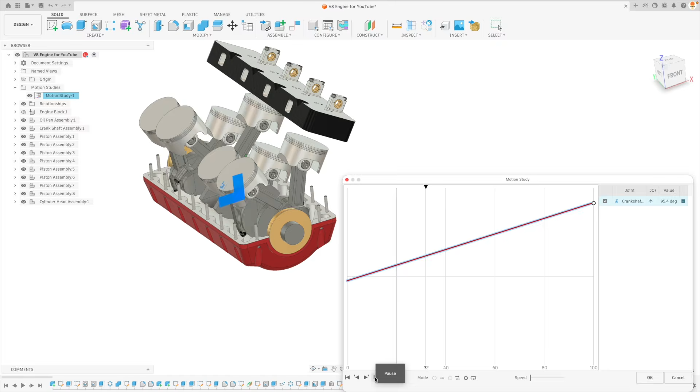Our V8 engine is moving along, but its firing order will complicate the valve train. Today we'll correct the piston sequence, confirm it with a motion study, and model a parametric camshaft with 8 precisely positioned lobes. Welcome to the Learn Everything About Design channel.

Let's correct the firing order and create our camshaft. So the first thing we're going to do with this tutorial is fix something. Let me show you what we need to fix. Let's just hide the engine block, and you can see that the firing order of our pistons, well, it's good, but we're going to change it a little bit. We're going to make our lives a little bit easier in the future.

So we can just go to the motion study, right click the motion study. I'm going to bring down speed, go to infinite loop, and then press play. So this is our current firing order, and again, there's nothing wrong with that, but it's going to make our life a little bit harder in the future.

The second reason why we're going to change it is I would actually like to make it so that it's the same firing order, from what I can research, as a Corvette. So let's do this together. I can show you how easy it is, especially because we have designed this entire assembly very well, and it should be very easy to make this fix. And you'll learn some things along the way too.

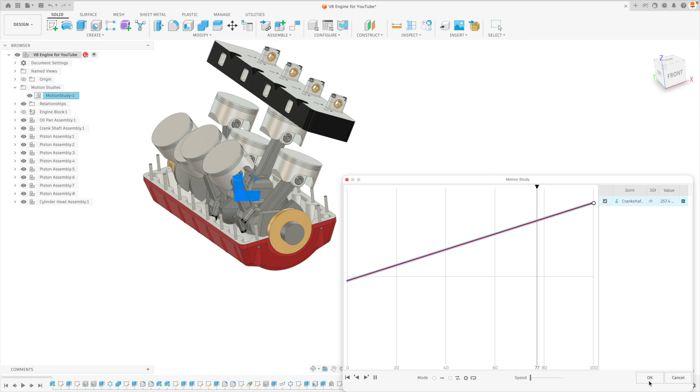So let's just go cancel. We can go minimize motion study, and then we're going to go right into crankshaft assembly. So I'm going to activate that by toggling that radio button, right click, and go isolate.

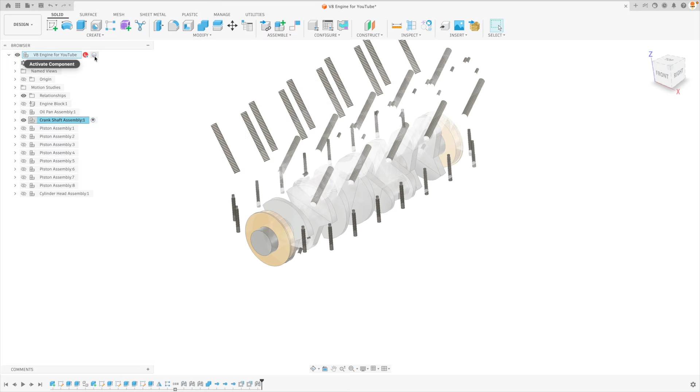This is one thing that's imperative for new users of Fusion to understand: when we activate an individual component or subassembly, you can see all of the tools within this subassembly that are currently being used to create what we see on the screen. All of these tools are in amongst the timeline for our entire project, but it doesn't necessarily mean that they'll all be in order. For example, the last few tools in the crankshaft assembly are joints, and so they might be somewhere completely different in our timeline.

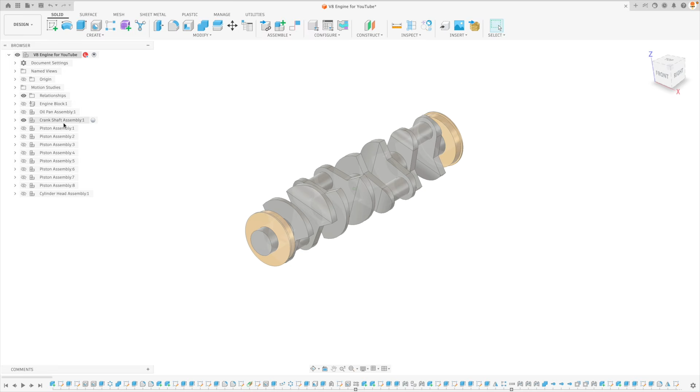We can utilize that in order to make good decisions, in order to keep our project nice and tidy. But let's go back to crankshaft assembly. I'm going to activate it, right click. I can go unisolate and back to isolate just to make sure that the crankshaft assembly is the only thing that I see on the screen.

Now what we'd like to change is this. We'd like this journal and this journal to be in the same position. So they're going to be pointing down, or 90 degrees clockwise from 0. And these two journals are going to be facing up, or 90 degrees counterclockwise from 0. So this should be very easy to do.

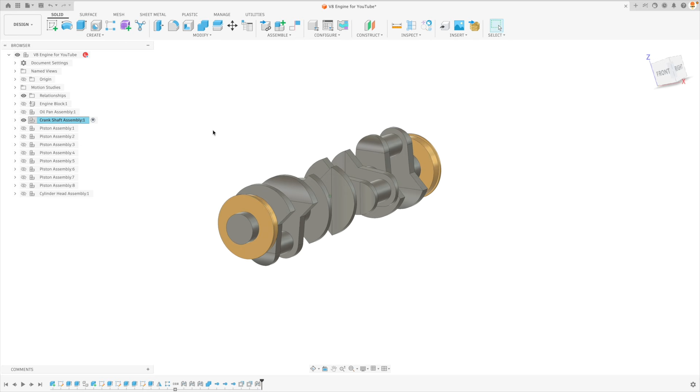What we have to do is, first of all, expand our folder, go to our crankshaft, and I'll show you here, if we click the radio button to activate it, now we have all the tools that we've used to create the crankshaft. Here I'm going to do the same thing: right click and go isolate, so all we see is the crankshaft.

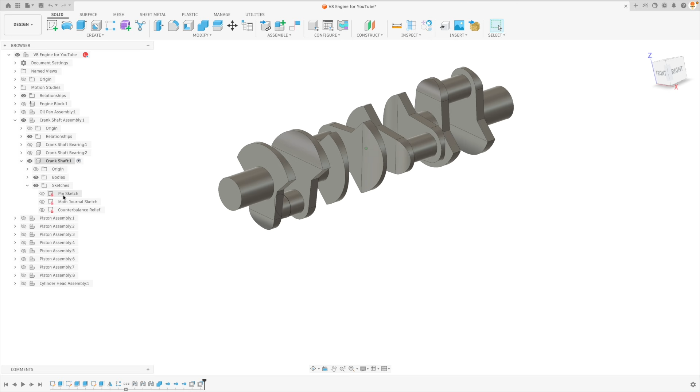Now if I expand the crankshaft component and sketches, you can see this is the benefit of naming all of our sketches, because we've got the pin sketch, which is right here, the main journal sketch, and then the counterbalance relief. None of those change.

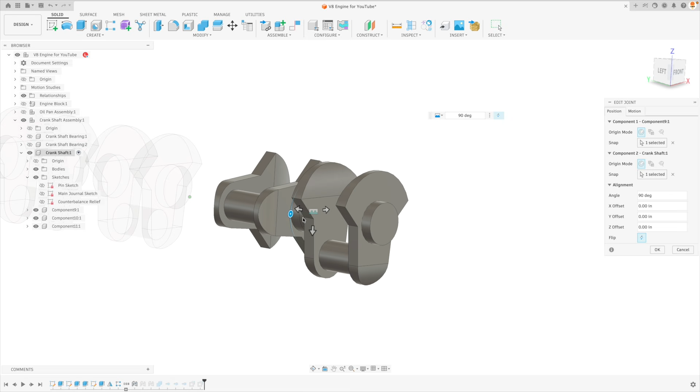What does change are our joints, our rigid joints. So the first rigid joint corresponds to this. Now because we've used joints, this is very easy to change. If we just used the move tool, well, it wouldn't be so easy to change, and we might make some mistakes along the way. But all I'm going to do is grab this rotation wheel and bring it up to 180 degrees. Let's go OK.

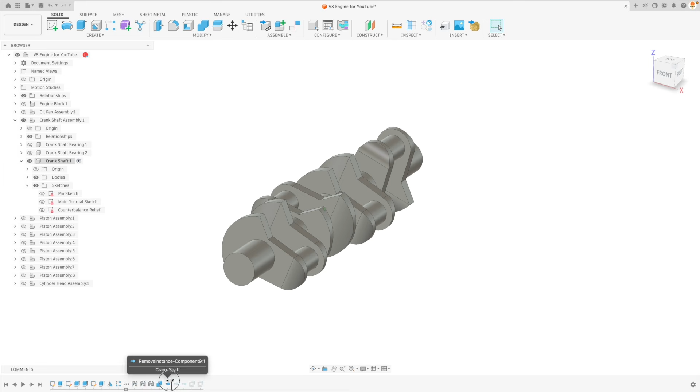And then what I'm going to do is we're actually going to go back in time. I'll show you what's happening here: as soon as I adjust one joint, it will actually go and reprocess every single tool for our entire project. But if I bring this timeline marker back to this point in our timeline, and then go back to our top level assembly, you can see that it will stop right there, and everything after it won't recalculate until we're ready to recalculate it. So this just saves a lot of processing power.

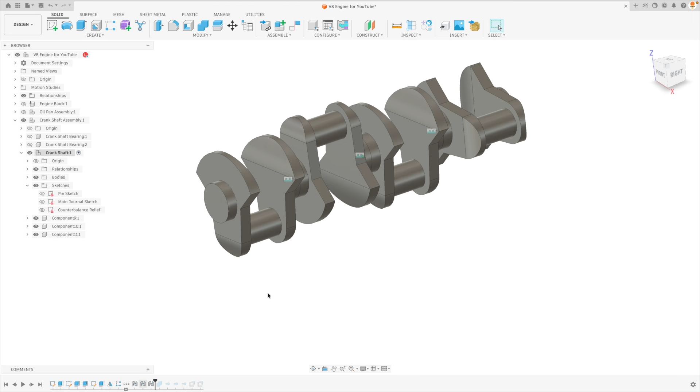Let's go back to our crankshaft, and I'm going to activate that. Let's go to the next joint. I'm going to do the same thing here.

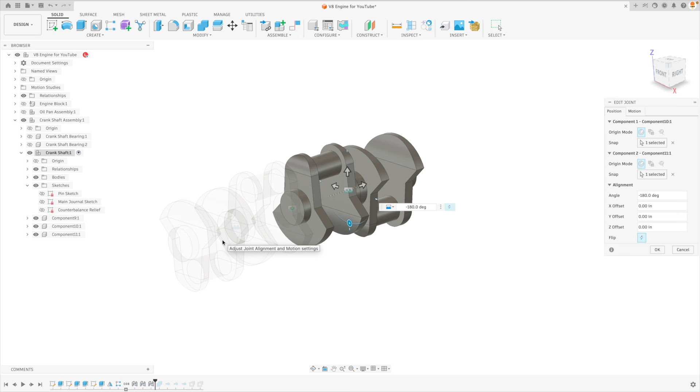I'm going to bring this all the way and set this right to 0 degrees. Then our last joint, I'm going to rotate all the way to 180 degrees. Each joint is based off its current location. So 180 degrees - well, the first one was actually based on 0 degrees, and this is 180 degrees from that. The next one was set to 0 degrees because those were jointed in the same location, and then the last one is at 180 degrees.

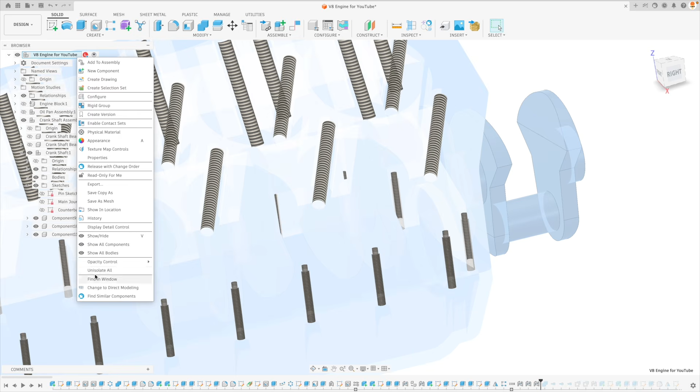Once we go OK, you can see the rest of our timeline still needs to be finished. So I'm just going to go up to the top level assembly and unisolate all. At this point, because we've designed our entire project very well, nothing should break. Let's hope for the best and go all the way to the end. And just like that, we have no errors, no alerts, no alarms, and our entire assembly is not broken.

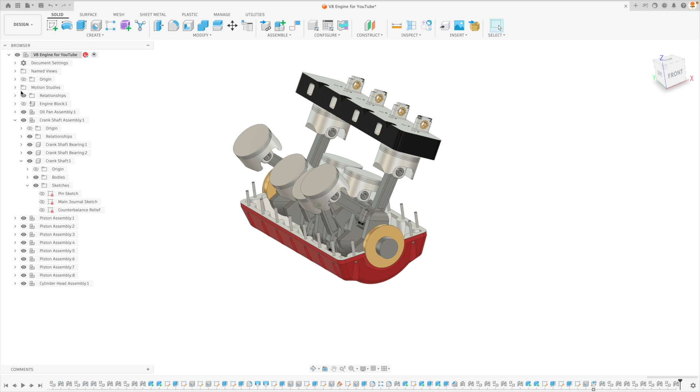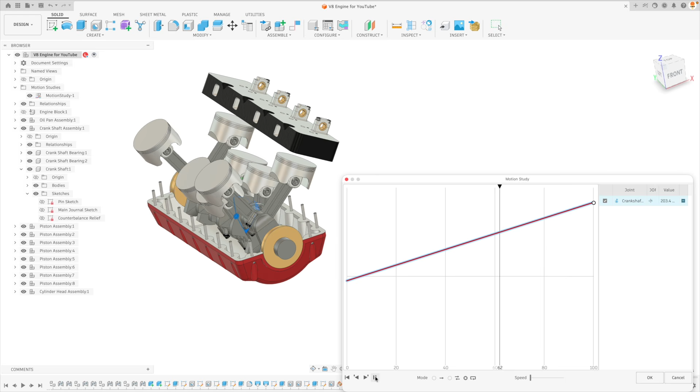So here we go. Let's go back to our motion study and see our new firing order. Again, bring our speed all the way down, go to infinite loop, and press play. So there we have it - the firing order is set to a Corvette. If I'm wrong about that, please let us know in the comment section below. If you know anything about firing order of engines, we'd love to hear from you too. I'm just going to pause and go OK, and now we can move on.

So I'm just going to go revert position, go back to the home position there, and we can make our engine block visible again. Now we're going to move on to the next component of our engine, and that's going to be the camshaft.

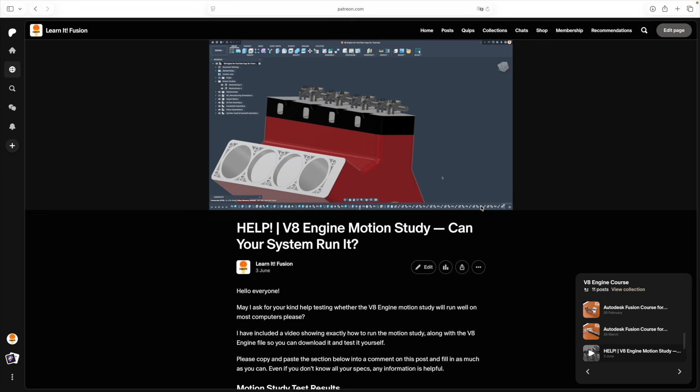But just before we get to the actual design of the camshaft, I wanted to mention that I know many of you have been waiting patiently for the next tutorial in this series. A little while ago on Patreon, I released a sample of the engine all the way up to the exhaust from what I remember. But I wanted to include the motion study for all of the rocker arm assemblies, the valves, everything, to see if people's computers could actually generate that motion study. Well, everyone came back and said no - after a few frames, the motion study failed.

So I had to do a ton of research. After that research, I found one huge thing within Fusion that's imperative, and I hope to share this knowledge with all of you so that you can benefit. I apologize for the delay in getting this out to everyone, but I wanted to make sure this engine will actually run and be fun to see a motion study at the end of all the components working together. Now, I still don't know if that's going to be the case. However, after doing all the research I've done, I made one huge mistake in the original practice design I've been working on behind the scenes.

That was - if I expand the cylinder head assembly, you can see we have the camshaft bushing assembly, the retainer assembly. These are static components - in other words, they do not move. Once they're installed, they stay there permanently. And when it comes to parts that do not move, we can create sub-assemblies within a sub-assembly, underneath the umbrella of our top level assembly, without any problem. But as soon as it comes to moving components - components that revolve or move in some other way - and we end up creating a link between those moving components and moving components within another sub-assembly, well, Fusion doesn't like that very much, and it won't work as smoothly as possible. So that took some time to figure out.

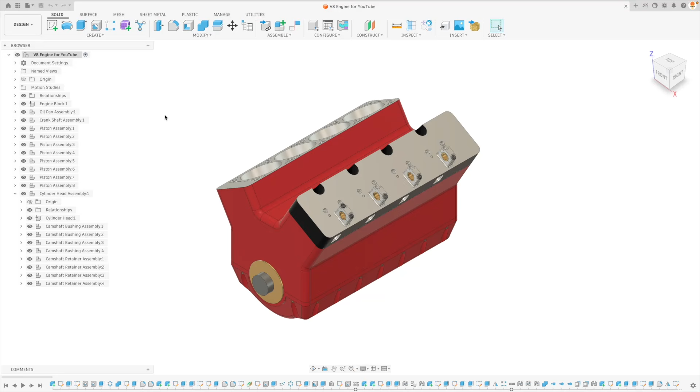At this point, we're going to create, under the umbrella of our cylinder head assembly, all of the components that move within this assembly, without creating any further sub-assemblies. So I'm going to create the camshaft and then all the individual components for the rocker arms, not as their own assemblies, but as individual components under this assembly.

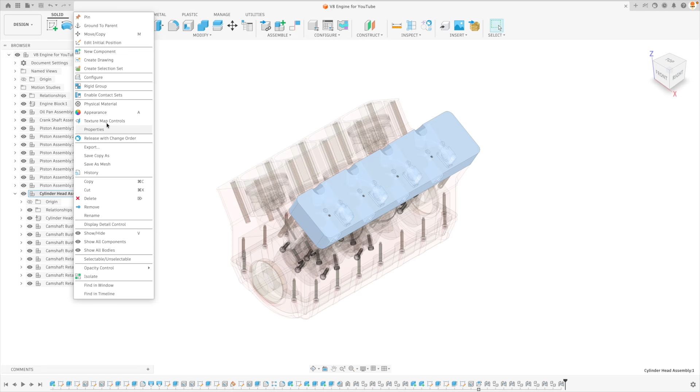The first thing we're going to do is create the camshaft. Let's right click and go to new component, and we'll call this the camshaft. Next, I don't want to see all the rest of the geometry and other components in the background, so I'm going to right click camshaft and go to isolate.

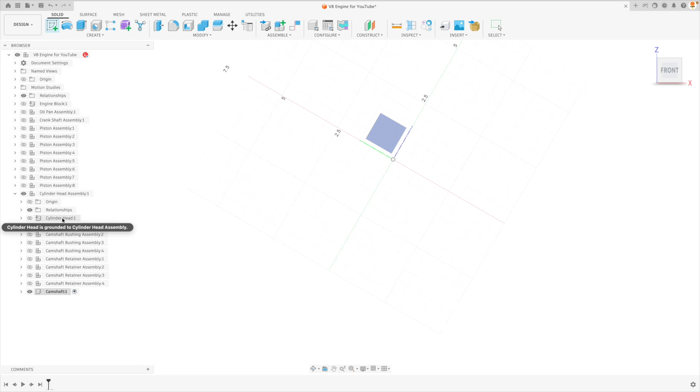Next we're going to create a sketch. If I go to the front face, you can see the orientation of our origin is not as expected. If we turn on the cylinder head, you can see this is indeed the center, or origin, of the cylinder head itself. So this is fine—we'd like to create a sketch on this origin because it will help align everything.

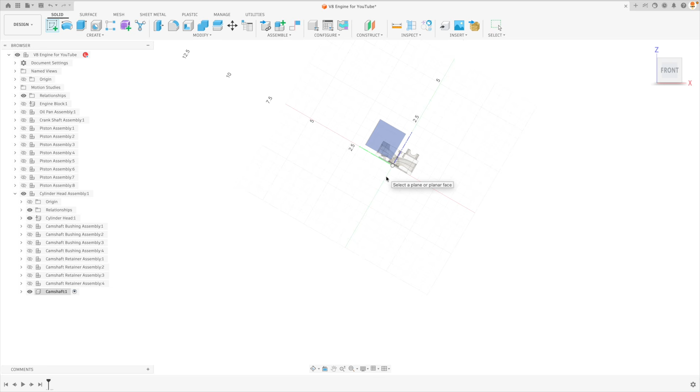Remember that Fusion is based on different relationships. So if we change the angle of our engine head, and we've created the camshaft based off this origin, that camshaft will automatically adjust to the proper angle, so we don't have to go and update every single feature when we make tiny edits in our design. I'm going to create it on this plane, and everything orients so that north is the y-axis—exactly what we want.

So I don't want to see the cylinder head at this point. I can hide that, and we're going to go to creating our camshaft at this point.

Looking at the drawings, we have a ton of different things—8 different lobes, for 8 different rocker arm assemblies—and then a bunch of different patterns, but all the lobes are designed exactly the same. Whenever we look at a drawing, if we can find patterns, we can repeat those patterns to save us a lot of work instead of having to draft or sketch every single element. Using patterns helps save a lot of time in that process.

This means that if we create all of our patterns based off that initial lobe, if we ever want to change that lobe, all we need to do is change the one sketch, and all the other lobes will update correspondingly.

So at this point, let's just create the lobe. I'm going to go to center diameter circle—here we see the shortcut is C. We're going to get into good habits and use all the different shortcuts. I'll repeat this throughout the entire course. Sometimes when I get going I just pick the tool in the toolbar, but let's get into good habits and pick the shortcuts.

Let's press C for circle and start here right at the origin. If we look at our drawing, we can see this is actually a radius value. When we're working with full circles, we specify a diameter—this is generally the case—and if they're semicircles, we use a radius value.

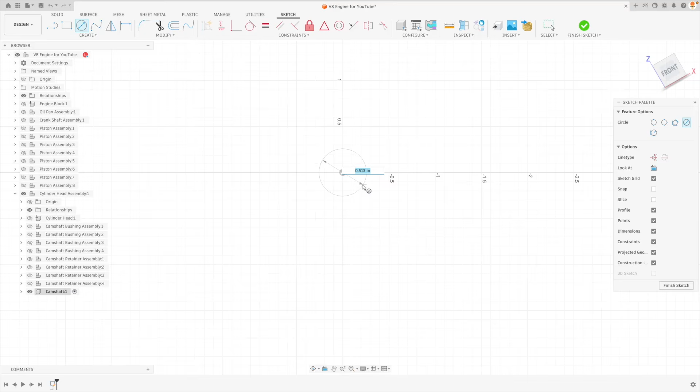I'm just going to click, don't worry about inputting a dimension right now. Press D for dimension, click on our circle, and now you can see it's in diameter mode, specifying a diameter. We don't want that—I want to right click and go to radius.

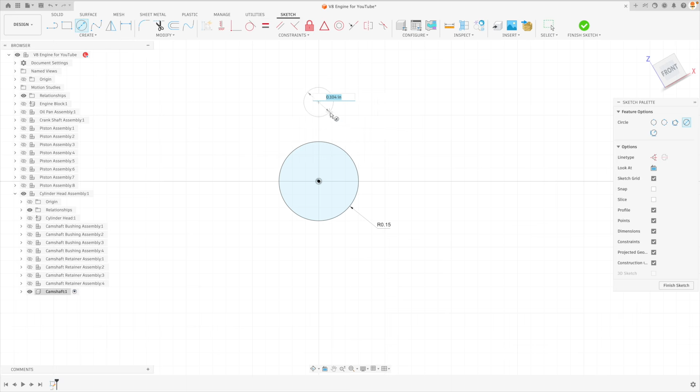So here our radius value is 0.15. Let's zoom in, press C for circle, and create another circle up above. Again, I won't specify a diameter value for that, but I do want to go to horizontal vertical and make sure that these two circles are perfectly vertical to each other.

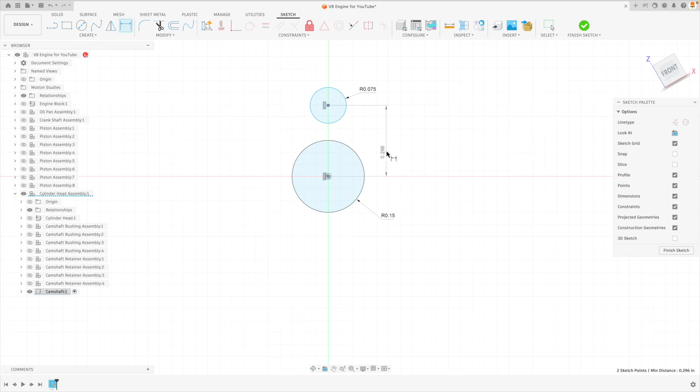Press escape to get rid of background tasks. Now I can move this up and down, no problem, but I can't move it left and right. So let's specify the radius value now, D for dimension, grab our circle, right click radius, and this is going to be 0.075. Our center point to center point is going to be 0.125 according to our drawing. So this is great, let's go to finish sketch.

We're not quite there yet, we forgot the tangent line. So let's go back to our camshaft, go to our sketches and double click the symbol there for sketch. We have to add our lines. So what do you think is the shortcut key for a line? Well, if you guessed L, you would be correct. So let's press L. Now here I'm just going to grab one of the circles and grab the next one.

And here we're going to go to our tangent constraint, select the line, select the circle, select the line, select the circle. So now all of a sudden we have a perfect tangency between this line and the two circles that we've defined. If you're ever wondering what a symbol means on the screen, just single click it, and in the bottom right you can see that it is a tangent constraint.

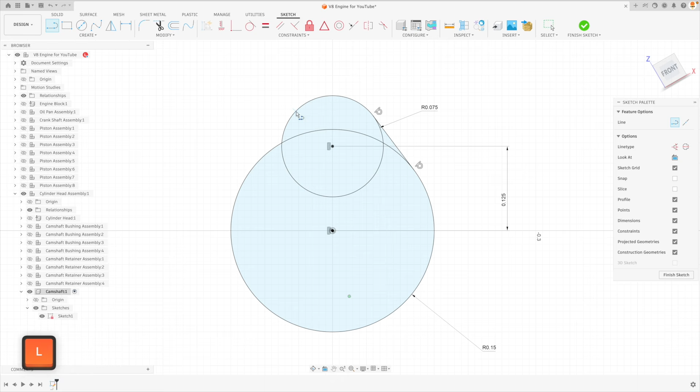Alternatively, we can press L for line, click on our circle, and as I move the line into place, you can see that it actually specifies or selects a tangent constraint for me. So I'm going to click right there as soon as I see that tangent constraint. The other side isn't constrained, but I can just go tangent, select the line in the circle, and now we have 4 tangency constraints right there, which help to make everything tangent for our camshaft. So this is great, let's go to Finish Sketch.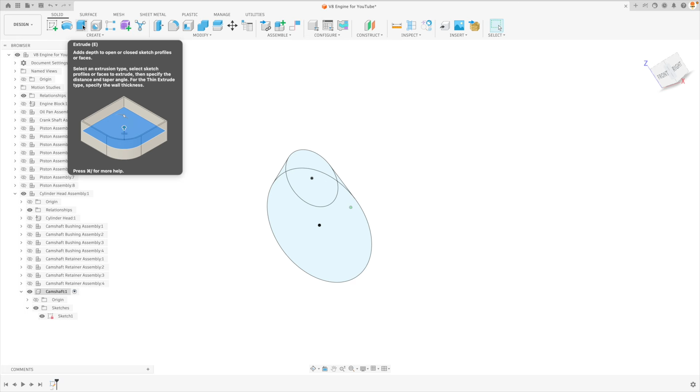Now what we're going to do is extrude. We could have gone into our sketch, and if this ever happens, if you click on the sketch and our model is nowhere in sight, just go to Fit, and it brings it into view. We could go to Trim right now and trim all this away. That's fine, there's nothing wrong with doing that, it might take some extra time. Generally, what I like to do is if there's not too many closed profiles, I like to keep them on our sketch because it's very easy to select them and it helps to prevent our sketch from breaking.

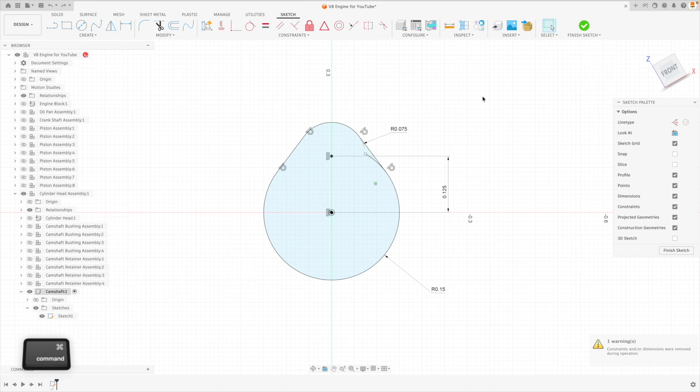So I'm going to do that. I'm just going to undo and not have any trimmed features right here, just going to keep them whole, but you can do whatever you want. You can trim them, you can keep them. If there are 100 different closed profiles, generally I like to trim them so that I just have to select one closed profile instead of 100 all the time. It just helps our model to be a little bit more bulletproof when it comes to edits and extrudes. So here we go.

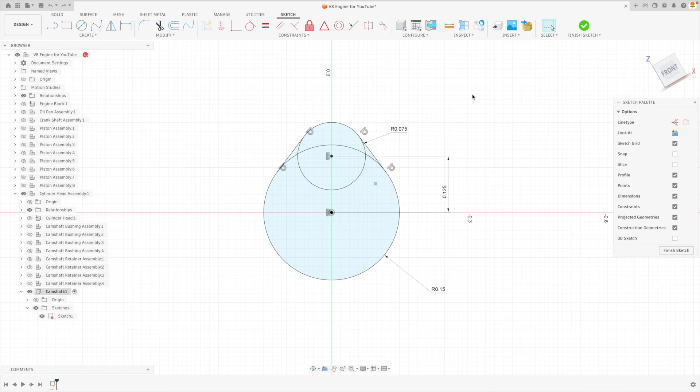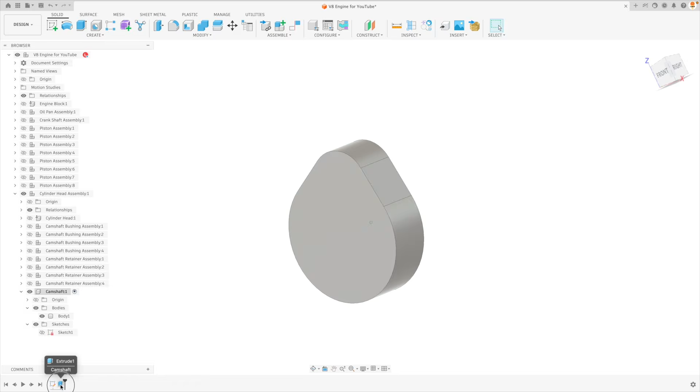Let's go Finish Sketch, let's now extrude this. What is the shortcut for extrude? If you guessed E, you would be correct. So let's pick all these different closed profiles. If you trim them, you'd only have to select one. Looking at our drawing, this is 0.1 inches for our extrude. Make sure that we have just created a body, so under our extrude the operation should just say new body. Let's go OK.

Next, what we're going to do is create a sketch right here on this face. Again, our body has disappeared, so let's go to Fit, which will bring it into view. Let's create a center diameter circle, and this is going to be 0.25 diameter.

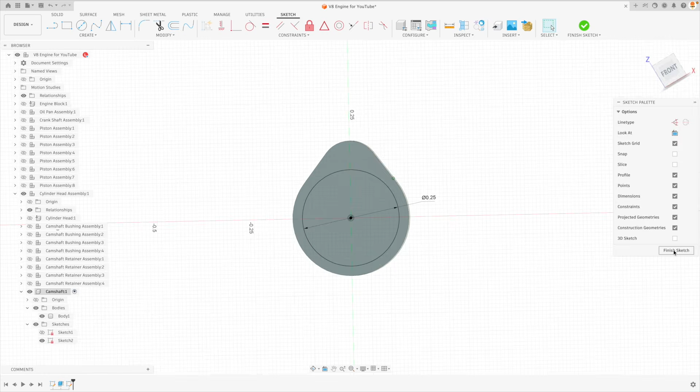Because this is a full circle, we can go Finish Sketch. And here we're going to bring this over to the correct value. This is supposed to go 0.7 all the way to the next lobe, so we're going to go 0.7 divided by 2.

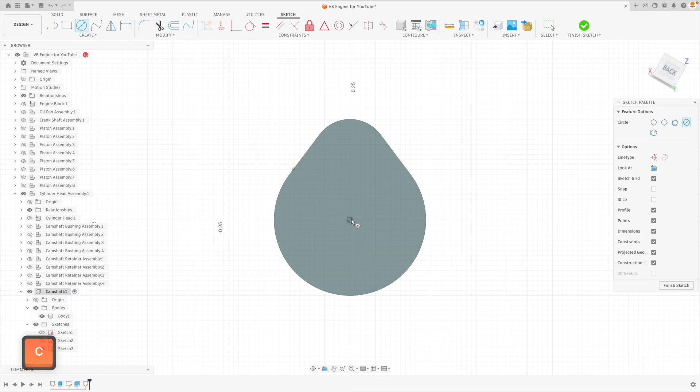Excellent. And then we're going to create another sketch on the other side. Go to Fit, C for circle, do the exact same thing here, 0.25. And we're going to extrude this as well.

Now, to mitigate how many edits we have to do in the future, if we ever need to make them, I want to make sure that this dimension is always the same as the other. So we have a couple different methods to do this.

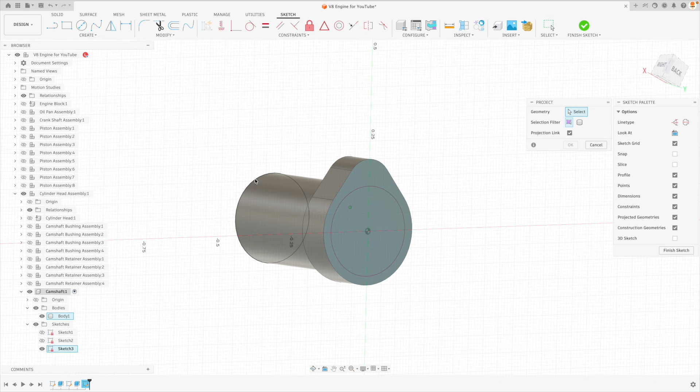I think the easiest way to do this is actually deleting this circle entirely and pressing P for project. On the opposite side, I'm just going to grab the circle, and you can see it projects it using this purple circle on this face. So whatever we turn this dimension into will automatically update on the other side.

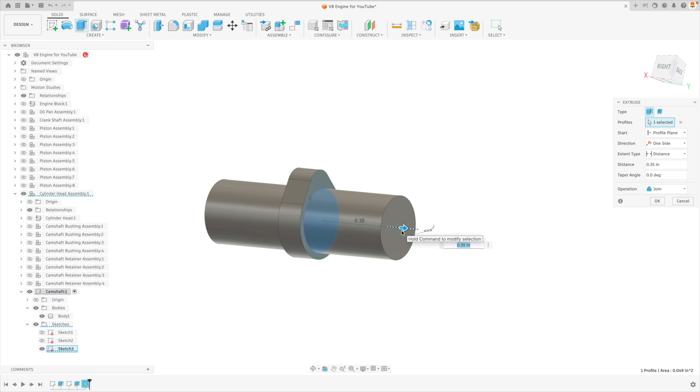That just saves us from having to create all these different dimensions and then having to edit them again whenever we need to make an edit in the future. So let's go Finish Sketch, and we're going to extrude this over to 0.975 divided by 2.

From this, we can use patterns to finish the rest of our camshaft. This again will make life very easy when we ever need to adjust something in the future. So what I'd like to do is go to Body, copy, paste it, go OK, and we can actually paste two more bodies.

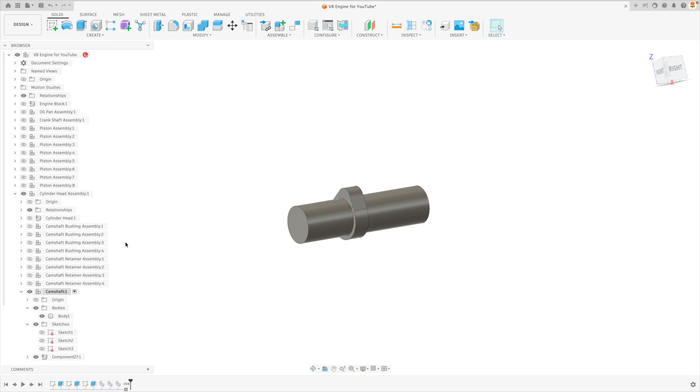Very good. Now I'd like to turn these three bodies into components. So shift-select all of them, and then go create components from bodies. At this point, we have component 27, component 28, and component 29. 27 is currently grounded, so I'm going to unground it.

And now select 27, and I'm going to move it off to the side. We can actually grab 28, move it on down here, 29, and here I've actually made a mistake. Sorry, everyone. Let's just go undo, undo, undo, bring it back to the bodies, and we're only going to do one body at a time here.

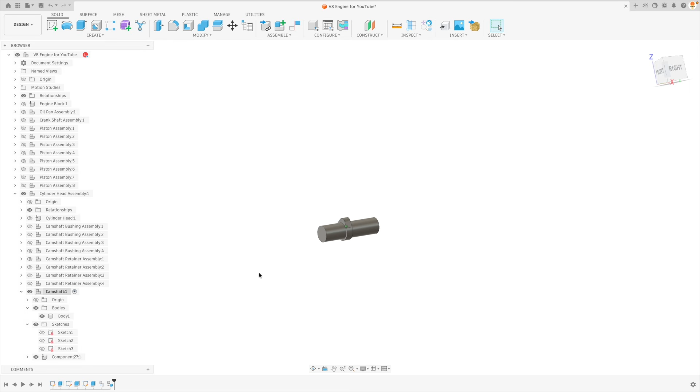So body 2 to start, we're going to right click that and go create components from bodies. Sorry about that, let's just go back in time, and I'm going to move. Component 27 is anchored, so I'm going to unground that from parent, revert position.

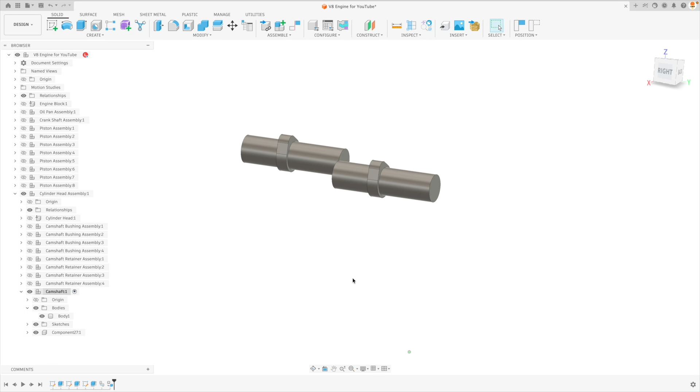27 now is something that we can join to the other body. So this is looking great. What we'd like to do is go to J for joints. Select this position and this position, and now we can orient this into place.

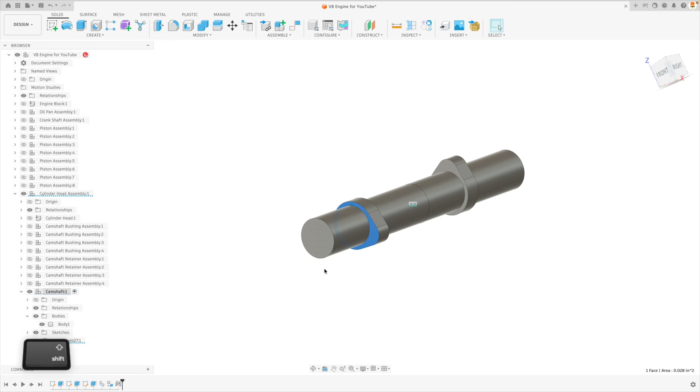So let's just move this on over. This is supposed to be 105 degrees according to our drawing. And we can verify a couple things here: is the distance from this face to the end 0.35.

And you can see we've actually made one more mistake. So I'm going to delete that joint, go back to 27, move this on over, and I actually have to join this face with that face.

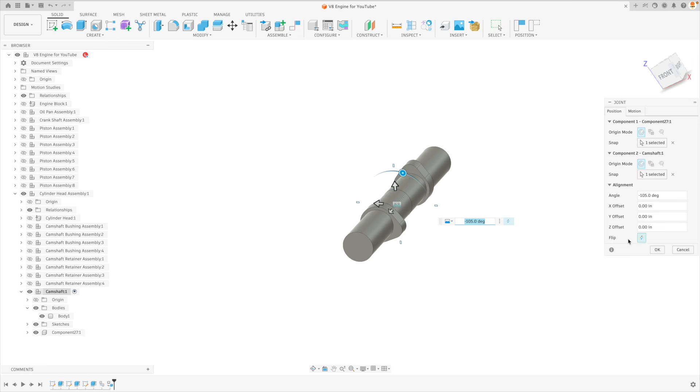So we verify everything. I'm going to move this clockwise to 105 degrees, and we can verify these dimensions now. Let's go OK, pick this face and the other face. You can see the distance is 0.488 — it's actually just rounding up to 3 decimal places, but we should have 0.4875. And then the distance between this face and this face on our drawing is 0.7.

So this is great. Now we can take this basically as an assembly and start patterning it as well. But what we're going to do first is combine it. So our target body is the original body, the tool body is over here, let's just go join and go OK.

At this point now it becomes one body that's still in our timeline. Very good. I'm going to right click component 27 and remove it. There we go, so now the joint disappears from there. This is one body we're working with, and we can use this to continue the pattern down the line. So let's go to body now and let's go copy.

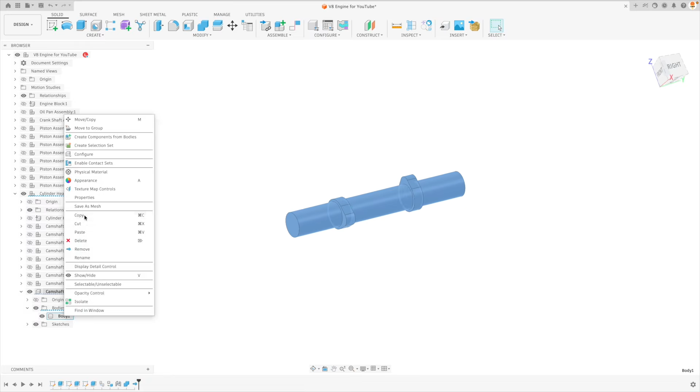This is originally what I was trying to do. I'm going to paste it. Let's paste it again, and one more time. We're going to have 4 sets total.

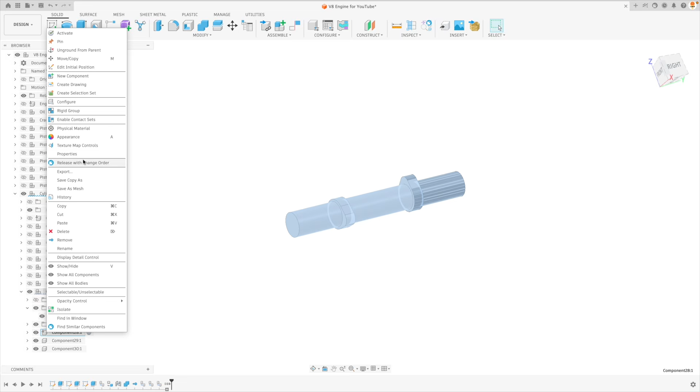Body 3, 4, 5, we're going to select those 3 and create components from bodies. Make sure that component 28 is not grounded. We're going to unground that, and we're just going to start with one at a time.

So 28, although all of them are laying on top of each other, if you click the component in your timeline, you can just move this off to the side. 29, it will move off to the side, and 30, move it off to the side. This is looking great.

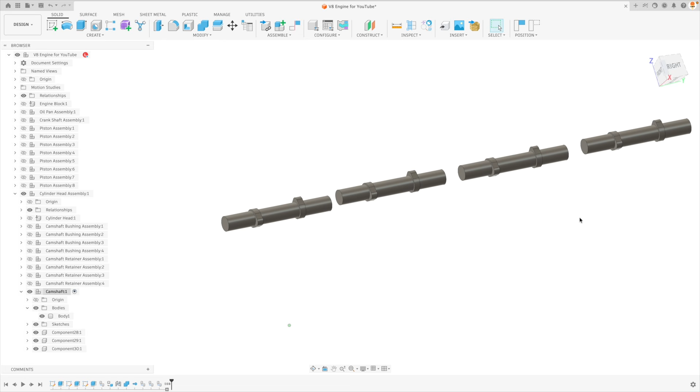Now we can start joining this all together. Let's go J for joint. I'm going to move on over here, grab that face and that face, and here we have to orient it properly. So what we're going to do is just rotate this 180 degrees.

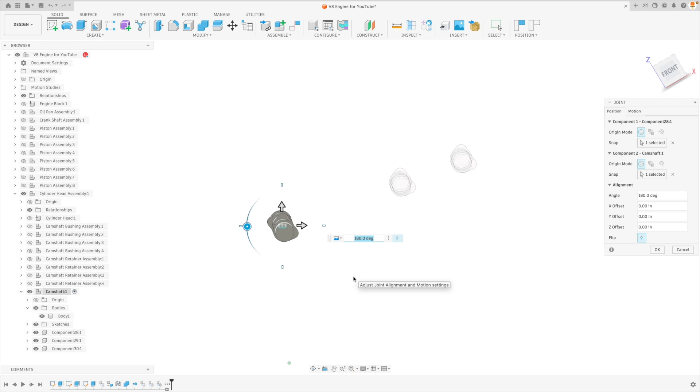This, again, with adjusting the firing order of our engine, is going to be a whole lot easier to work with in the future. So 180 degrees, that's perfect.

J for joint, grab this face and that face. This can remain at 0 degrees. Right now it's set to 180, I'm just going to set it to 0 so that both of those lobes are facing down. The front lobe here is facing up. This is looking great.

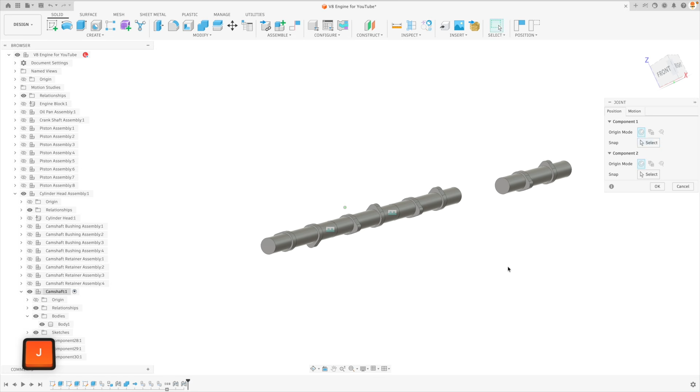And then our last one, we're going to select the face, select that face. This is going to be oriented 180 degrees. So when we look carefully at this, we have lobe 8 and lobe 2 are exactly the same orientation, lobe 1 and lobe 7 are also the same orientation, lobe 3 and lobe 5 are the same, and lobe 4 and lobe 6 are the same as specified on our drawing.

But right now we still have a subassembly camshaft. We only want one body in here. So we're going to go back to combine.

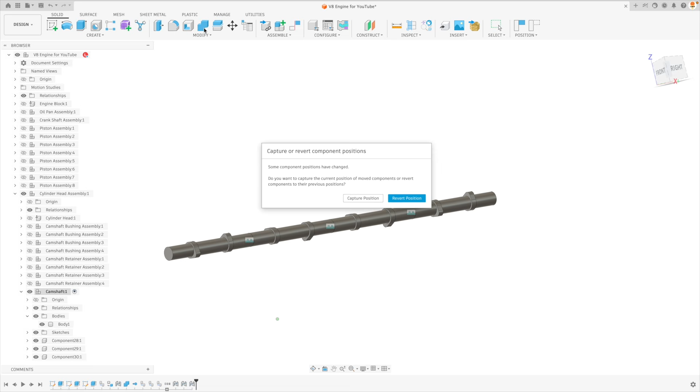We're going to revert position. That's fine. Target body is going to be the original, tool bodies are going to be the rest. Let's go OK. Now we've got one body under camshaft.

There's no more body left there, just an origin. So I'm going to take all 3 of those components and I'm going to remove them. Make sure to remove, not delete. And now we have one finished camshaft.

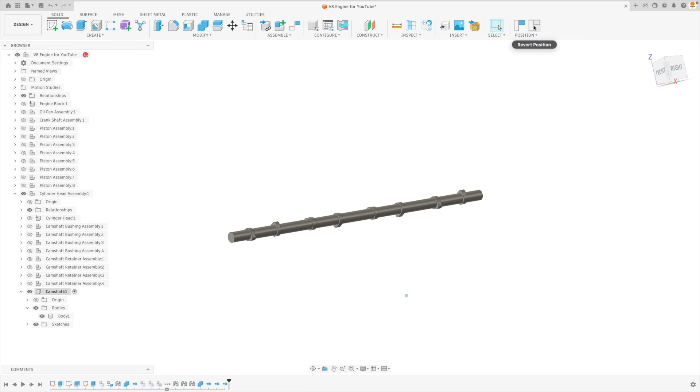So let's go to revert position. Let's just minimize our folders here. Go to cylinder head assembly, we're going to make that active. Isolate it. And now what we can do is take this camshaft

and we can place it where we need to place it. Now, we're not going to worry about timing too much at this point. We're going to get to that point in a future tutorial where we're going to do a ton of motion. So hope you will stick with us.

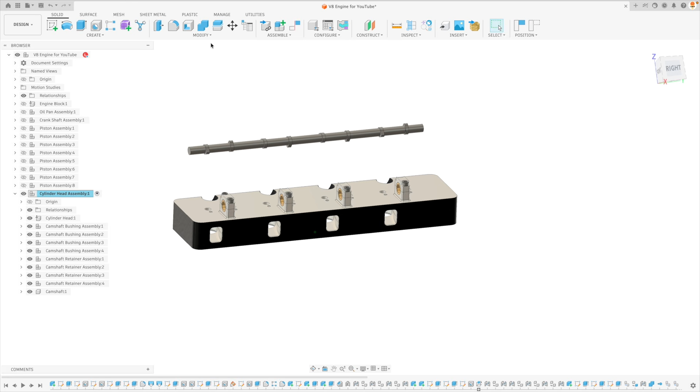But what we're going to do is go to J for joints. And what we can do is this little section right here, we'd like it to be centered to this bushing. So here's the good thing with Fusion, with each individual section there is a midpoint. I'm going to grab that midpoint and do the same thing over here.

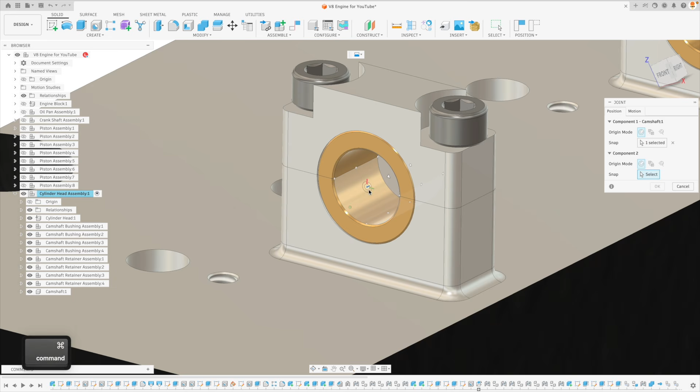I'm going to grab one portion of this bushing, and here it's very hard to select that midpoint. So I'm just going to hover over the face, hold down Command on a Mac, Control on Windows, and select that midpoint right there. This should place it perfectly into place.

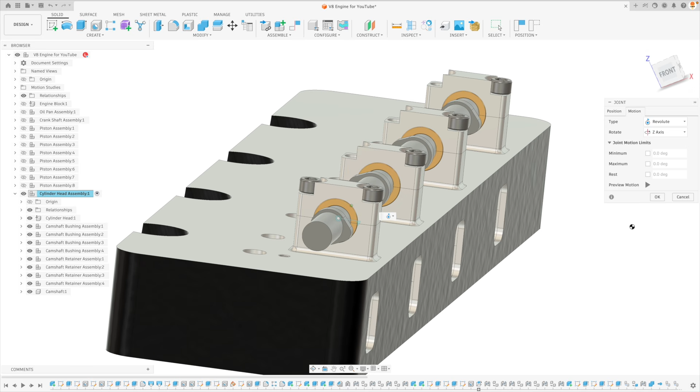And then I'm going to add some motion to it. It's supposed to be revolute because this is going to be rotating. In real life, it's actually going to be connected to the crankshaft via a bunch of gears and chains and things like that. We're going to add motion to this, but for now, we're just going to specify it right there. The rocker arm assemblies are coming up next.

Again, we're going to put them all under the cylinder head assembly, but we're going to see some really neat motion coming up soon.